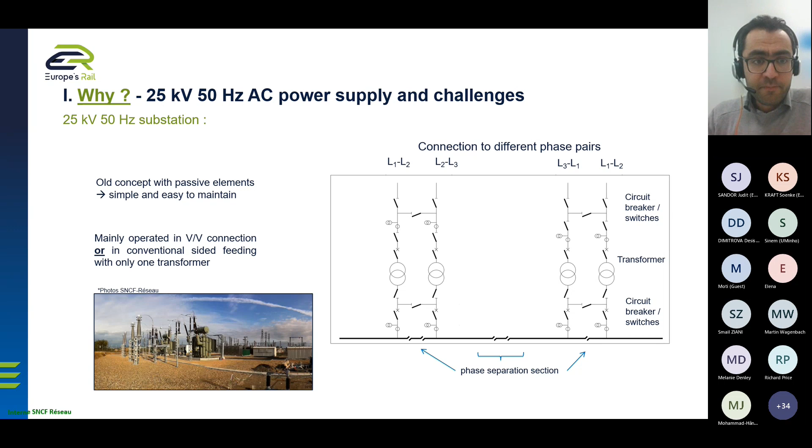The first challenge is increasing traffic. In the future, all studies show traffic will increase, and as an infrastructure manager we should answer this challenge by increasing the capacity of the system. What is expected in the pluriannual energy plan in France, for example, is that we should answer the challenge by optimizing the infrastructure. We should increase overall traffic, especially freight transportation, and facilitate the shift from other modes of transportation like classical vehicles. So we should optimize the power supply without necessarily creating new heavy installations. That's why we should optimize the existing ones.

Another challenge the 25 kilovolt system is facing is voltage imbalance. This results from the conventional connection between the transformer substations and the transmission system. A conventional substation is connected to a pair of phases, and it draws its power from 2 phases of the transmission system. These connections are alternated from one substation to another, and overall we face an imbalance in the voltage at the transmission system. This raises questions and problems regarding the quality of the power. The operator of the transmission network, if we are not compliant with certain thresholds, can impose financial penalties. This phenomenon can also affect other consumers connected to the transmission network. That's why this voltage imbalance should always be kept in check.

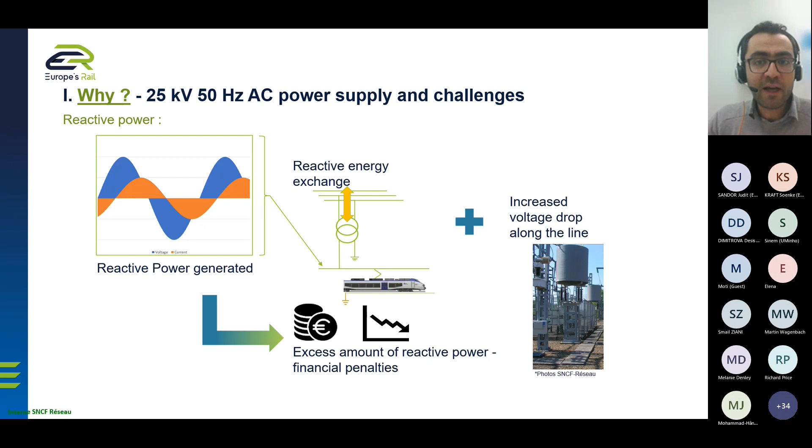Another challenge is reactive power. We are working on AC traction power supply, so in addition to voltage imbalance, the transmission operator fixes thresholds for reactive energy exchange with the transmission network. Again, if we exceed the threshold, we have additional financial penalties. Today we usually use passive elements to address this reactive power, like the voltage drop on the line. These passive elements are okay, but they are limited in their impact, so we need better solutions to tackle this problem actively.

Another challenge is the phase separation section, which is the separation between two collateral sections. On the 25 kilovolt, 50 hertz power supply, this adds some constraint on the operation of trains. For example, the driver has to deactivate or open the circuit breakers when the train is running through this phase separation section, which leads to decreased power quality and decreased efficiency. This aspect is related to the topology of the 25 kilovolt power supply. I think one of the aspects we should consider when optimizing an existing solution is to try and eliminate this constraint. For example, in DC traction power supply, we don't have this constraint on drivers. When we think of an interconnected system, we don't usually think of separation between the networks, so we need to connect the system to make it interconnected.

So what are the solutions? How are we tackling these challenges? In work package number 3, we worked on FACTS, flexible AC transmission systems. These are power converters that can be installed and connected to the existing system. They can also be an alternative solution to conventional substations. These power converters can actively control power flow, either reactive or active. When we talk about a smart grid, a smart traction power supply, we should integrate these technologies. They are very important in a fully interconnected and integrated rail power supply.

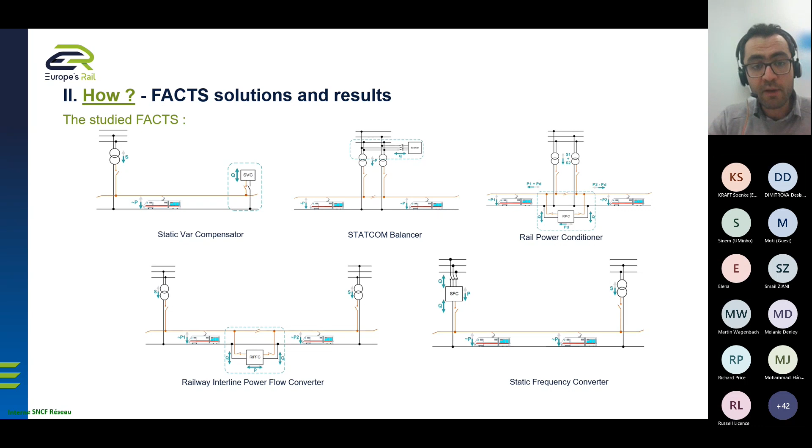In WP3, we based our study on two use cases, two lines in France. The first, use case number 1, is a 25 kilovolt line supplied by 7 substations. This line was a good use case because today we face a lot of power quality problems on it, so it was a good basis for studying and evaluating the advantages of FACTS.

The second use case is a line operating on 2 times 25 kilovolt, supplied by 3 substations. It already has good power quality, but we studied it because it's a good way to compare the technology to 2 times 25 kilovolt, since that is already a way to improve power quality. So we based our studies on these two use cases.

Some of the results I will not go into in detail, but I'd be happy to answer questions later. For the static VAR compensator, we tried to mimic what an ideal double-side feeding would produce on a line. We did a lot of investigation, especially Esmeralda simulations and Citrax Track Designer software, as a basis to compare and see the actual possibilities of the SVC.

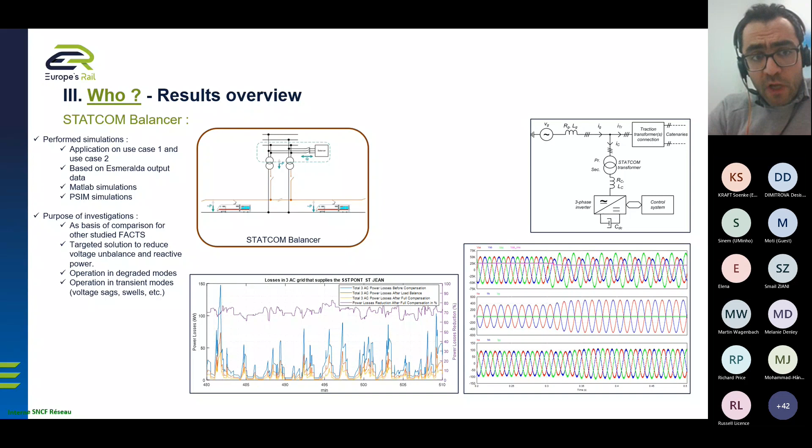RPC is the monophasic converter installed on the secondary side of the transformer substation. As with the StatCom balancer, we studied transient phenomena like voltage sags and swells, and the active power transfer between one section and the other. We showed it has some advantages, and if we tweak the system and control method of the converter, we can produce another type of application, presented in the next slide.

The RIPFC is the monophasic converter connected to allow double-side feeding, mainly by allowing active power transfer between one section and the other, all while keeping conventional substations operating on different phases. We investigated several control strategies and identified one as the most promising. We showed this system basically has an SVC feature, but it can also transfer active power. We increased the readiness level of the system, and we think it's promising for the next phases of investigation.

The final system is the SFC, static frequency converter, the triphasic-monophasic converter which is supposed to replace a conventional substation.

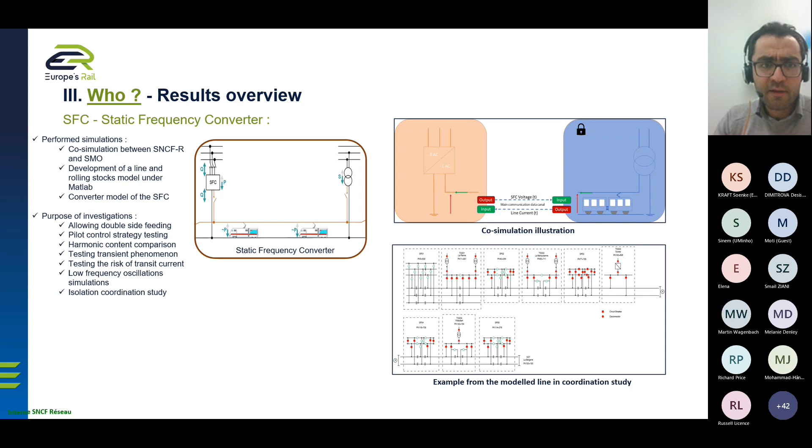We investigated the pilot control strategy, meaning the SFC will synchronize with the transformer on the adjacent substation. We also investigated low frequency oscillations and did an isolation coordination study, which shows the evolutions we should consider when adapting the protections. So it's a very promising solution, and FACTS can allow double-side feeding into 50 hertz.

Finally, the cross-project challenges the investigated technologies help resolve: our FACTS technologies can be solutions to increase traffic capacity by upgrading the 25 kilovolt line. They enhance voltage level and overall power quality, so we can use them as a way to answer increasing demand.

Improving asset management: when we talk about FACTS, we talk about smart grids, ways to better manage active power and energy inside the traction power supply, improving asset management overall. They can also allow future interfaces with other energy production like renewables — we haven't investigated these aspects, but it's totally a possibility.

And finally, the virtual model data: active FACTS, flexible AC transmission systems, are active components. We gained a lot of experience in virtual modeling because we used several simulation software and co-simulations, and gained a lot of experience regarding this aspect.

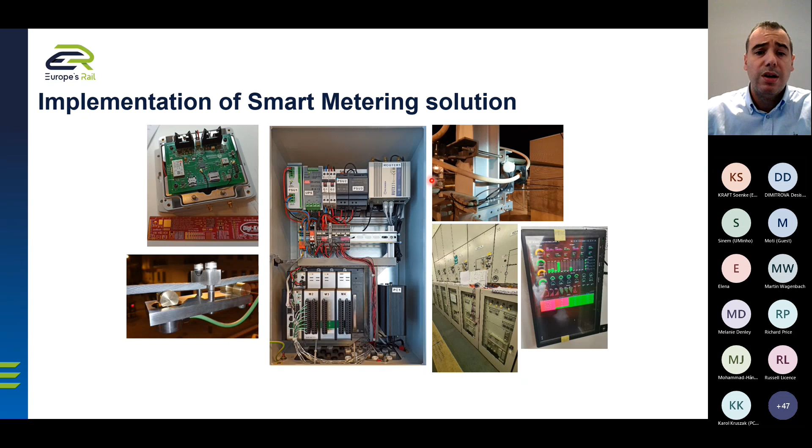Now I will present in more detail the impact of smart metering. I will start with the asset management topic, with an example about fault detection for catenary systems. This user application is, I think, novel and very useful because we have two novel approaches.

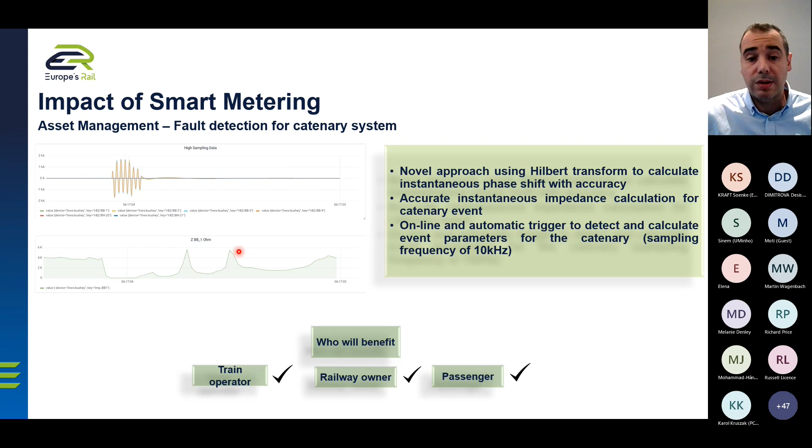So here we have an example of the high sampling frequency from the current and the calculation of the impedance, with a low value that corresponds to a really high value of the current. And of course, who will benefit?

So the train operator, the railway owner, and the passenger. Another interesting impact of smart metering about asset management: we also have, for use case 2, an interesting approach using machine learning about the track switches to detect and get more information about failure detection.

Now I will talk more about the energy consumption and the demand. One of the most interesting user applications, I think, is the detection of regenerative braking energy using machine learning, and it's possible to quantify this kind of energy. This is for use case one.

I think it's a very interesting approach, especially about DC, because like this it's possible to use only sensors in the infrastructure to detect the braking energy. And it's possible to quantify this energy and maybe improve energy consumption, because it's possible to have more information on where to install some storage, some batteries, to capture this kind of energy.

So of course, who will benefit? The train operator, the railway owner, and the passenger.

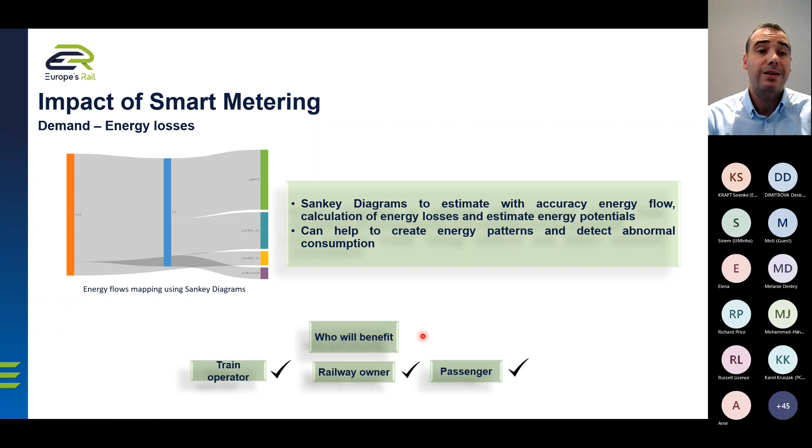And I will now talk about another impact: it's more about the software validation. So the real data we use is also very useful to validate or improve the software tools.

So the train operator will benefit, and also the railway owner.

Now I propose to take a look at the impact of smart metering, but with an interactive session, to show directly what our dashboards look like and how it's useful for a user, for an engineer. So I will share my screen again for just one moment.

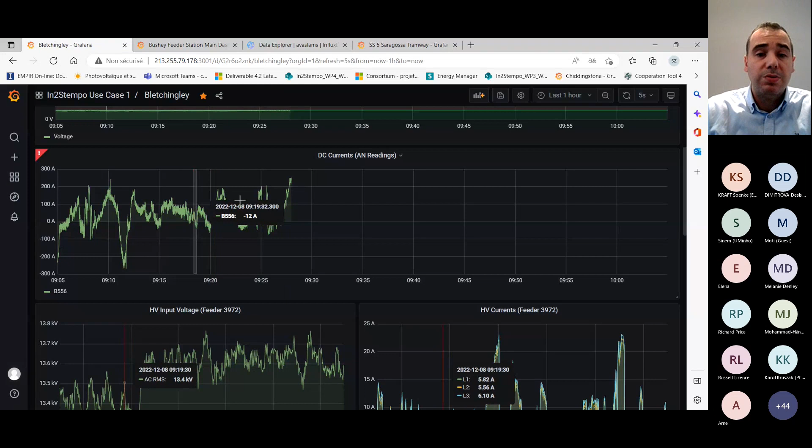Okay, so I will start with this kind of dashboard to get more information about, for example, the current. Here we have live data from Bletchingley, a substation from use case one for the Tonbridge railway line. So it's possible to take a look at the data, for example, from the current, from the feeders.

We also have the DC voltage from the catenary, and it's possible to have information in real time and some interesting indicators. For example, we have information about the apparent power and also the power factor.

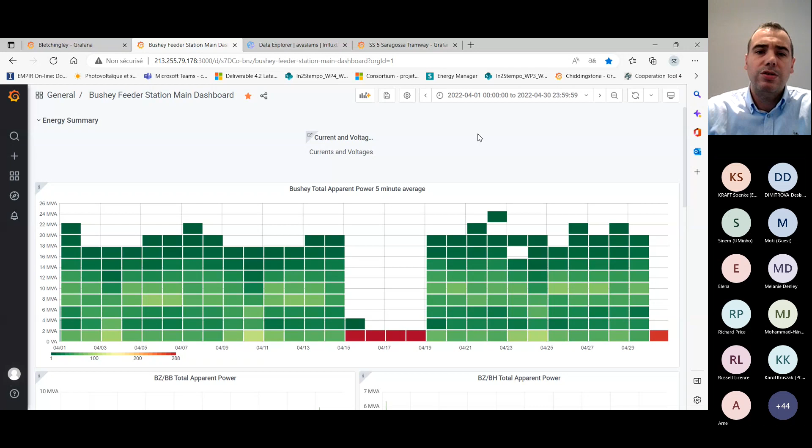I will also show very quickly another interesting user application. Here it's more about use case 3. I'll just refresh the logging and show you use case 3. Just a reminder, it's more about 25 kV here and 50 hertz.

So here, for example, for the month of April 2022, you have information about energy consumption. Here we have the power for 1 month. It's possible to zoom in to have more information about the consumption and peak loads, because you have a high sampling frequency of 1 second, to have more information about the peak loads energy. So you have the power.

Just to give you better information about what I presented before about the detection of events like short circuit for the catenary, we have some triggers, some alarms, for example, for low voltage and high current. I can show you a quick example.

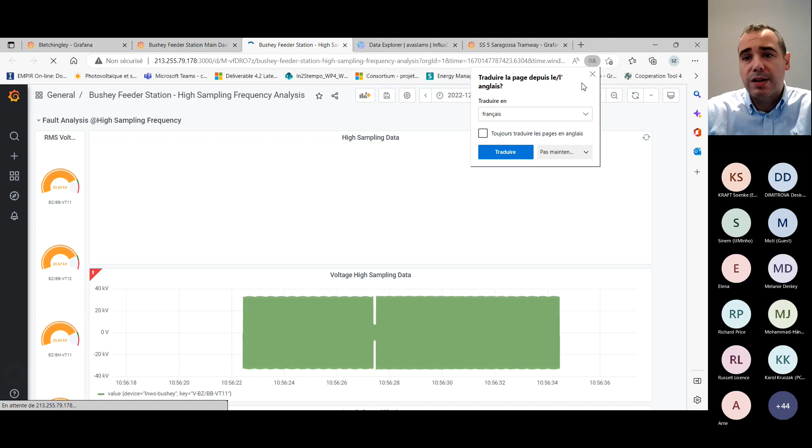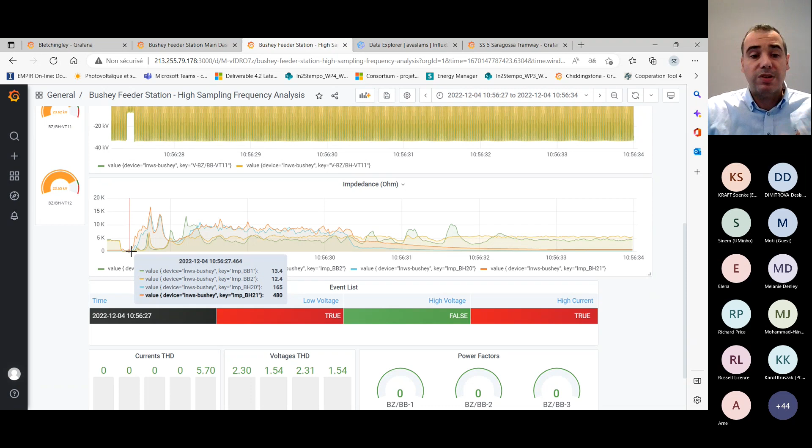Here we have the acquisition at a high sampling frequency of 10 kilohertz from the current and the voltage, so we have the raw data. We use this kind of raw data from the current and voltage to calculate, for example, the impedance of a defect, and like this it's possible to have information about the location. We also add other indicators, other alarms, for example from the THD. Here we can see that the current from the THD is a little bit high.

Another example, I think it's very useful for a user to understand how it's possible to create a dashboard or an indicator. Here we are in the database of work package 4. For example, for use case 2, we can take a look at the data to show some examples. I will submit this kind of data to show how easy it is for an engineer to create an indicator or information.

So I'll take a look at the script from InfluxDB, the script from Influx. I'll copy this script. I'll go to the dashboard of use case 2. I just need to refresh the access. Okay, I need to add a new panel, for example. I'll create it and add the script, paste the script. I'll refresh, for example.

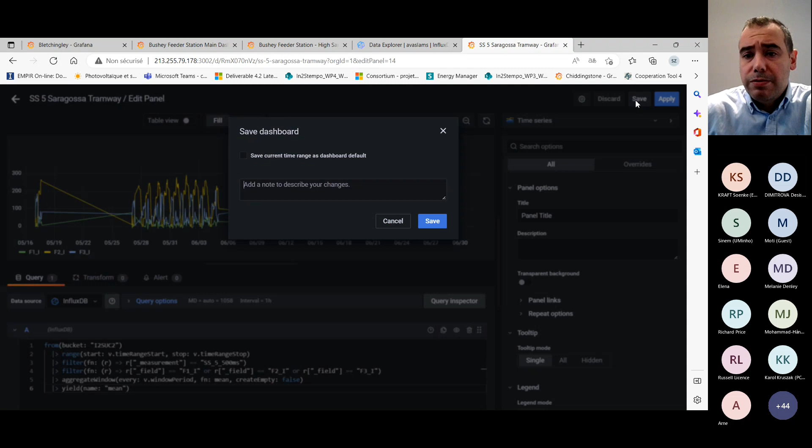Now I have access to the data, for example, for the 3 currents from the feeders from substation 5. I'll save this, and come back to the dashboard, and I have access to this new panel very easily to get the data. I can zoom in and zoom out on this dashboard, and change the sampling frequency very quickly, for example, just to put here another piece of information from the data.

So if I want to take, for example, 1 minute, and refresh, I have the information with better accuracy, for example. I'll come back to my presentation to finish.

I'll finish with the addressed cross project challenges. We have 3, of course: the demand, improving asset management, and the virtual modeling versus the data. Our contribution for work package 4, for example for the demand, is the energy flow information, so we can help identify opportunities for reducing losses and improving efficiency by using timetables or driving style changes. It's possible to have more information on how we can reduce energy consumption.

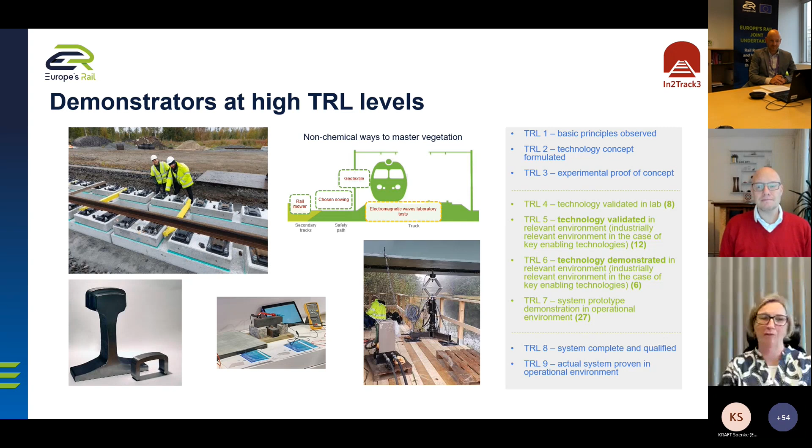Thank you, Pernilla, many thanks for your introduction words on this cluster. We are going indeed to go now into the details with one of the solutions you mentioned, the 3MB system. So I'm inviting Carlos Hermosilla to join the virtual stage. Carlos, you have been working for the past 10 years at the Acciona R&D Center, and you are somehow the co-author of the 3MB system that will be presented today. Carlos, please, the floor is yours.

Thank you, Sebastian. Yes, as Sebastian was saying, I'm Carlos Hermosilla. I was deeply involved in the development of the 3MB concept from its very beginning. The 3MB is basically a slab track system composed of precast elements.

The idea is that it would be modular as much as possible, so the assembly would be easy and the positioning would be simplified. It has a top-down alignment strategy, so the rails are placed exactly in their correct geometry, and then the difference between the substructure and the rail is gapped with in-situ fast-setting mortar, so that it takes less than 24 hours to harden. It was designed to allow all kinds of traffic, from the very heavy to the very fast.

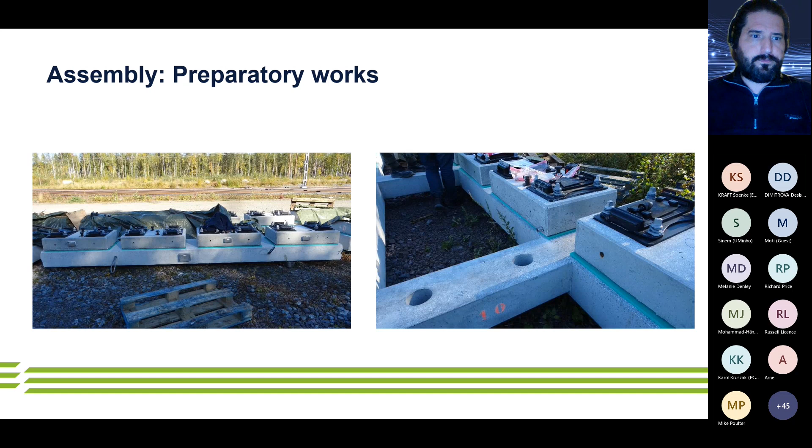Here are some pictures of the assembly. The system was originally thought out to install the base slabs first and then the blocks, but we made some tests and discovered they could be assembled in full modules. Each module is 4.8 meters long with 8 blocks. After all the modules were in position, which took about 20 minutes per module, the rails were placed and the leveling of the system started.

In order to level the system, we used a device we call false sleepers.

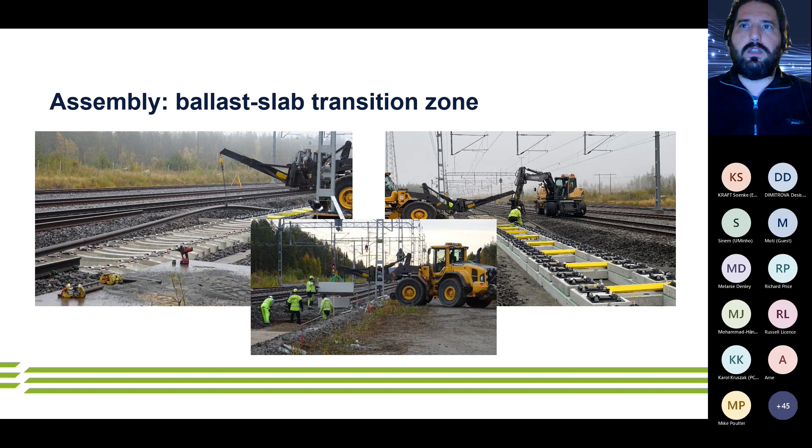The pouring of the concrete was performed at night because we were very short on time and had to press on. In this picture, you can see the false sleepers in place, the formwork for the mortar, and the contraptions used to help the mortar go into its place.

And here is a short movie that Trafikverket prepared with more information.

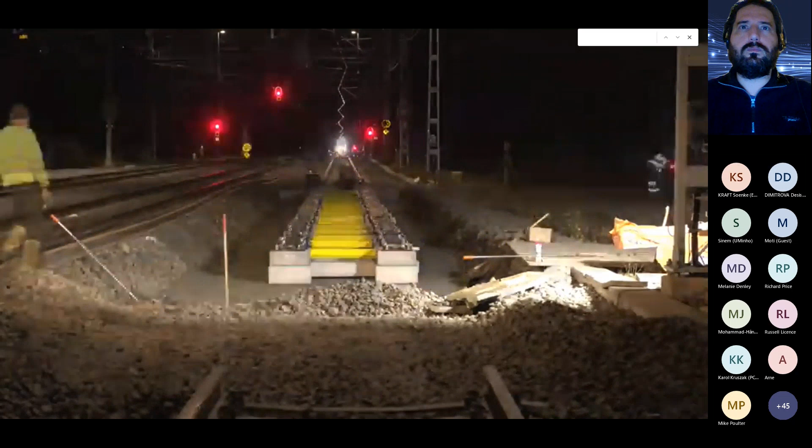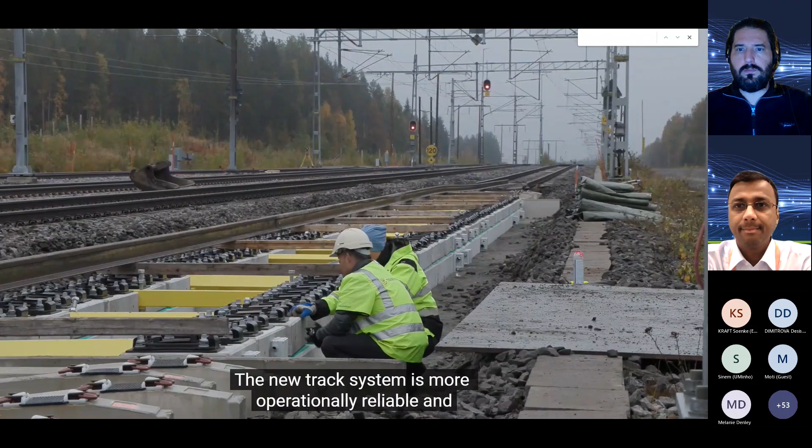Within the EU's railway research programme, Shift2Rail, a new type of track system has been developed. It can be described as a hybrid between ballasted and slab track systems. The new track system is more operationally reliable and requires less maintenance work than older models. It's much faster to build and install, and current maintenance methods work as well. The unique thing about the new construction is that it's made of modules, allowing components that break or settle to be fixed easier and faster than today. Overall, it leads to increased certainty when calculating life cycle cost.

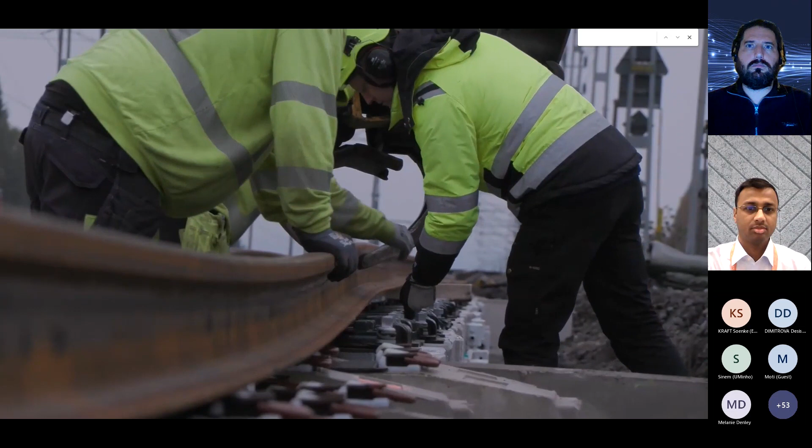The track system is tested in regular traffic on Malmbanan. The full-scale field test is carried out over a distance of about 50 metres at a place in northern Sweden called Gronsjö.

Coming out in track is important and necessary. However, safety is the most important issue when we are out in track. This is a collaboration between the infrastructure manager, the industry and the academy.

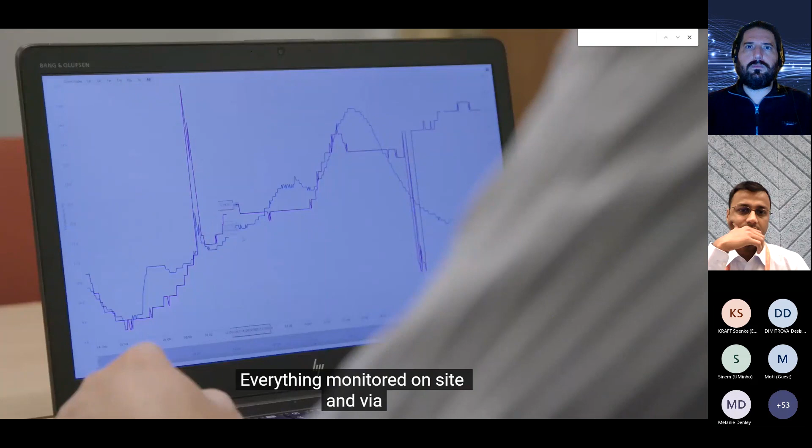We are here to evaluate the performance of the track system. The demonstration will last for almost 2 years until 2024. The entire life cycle is tested from installation to operation and finally decommissioning. Everything is monitored on site and via continuous digital diagnostics.

The work to develop the new track system has taken almost 10 years, and it's adapted to really heavy freight traffic, up to 32.5 tonnes axle load. The new track system is also adapted for high-speed trains, up to 400 kilometers per hour.

With the construction of this demonstrator, we have reached a critical milestone in the development of the 3MB system. After 8 years of design, development, testing and optimization, we're finally ready to install in real operational track. Not only that, but this track, the Malmbanan, offers extreme conditions with very heavy axle loads and very low temperatures in winter.

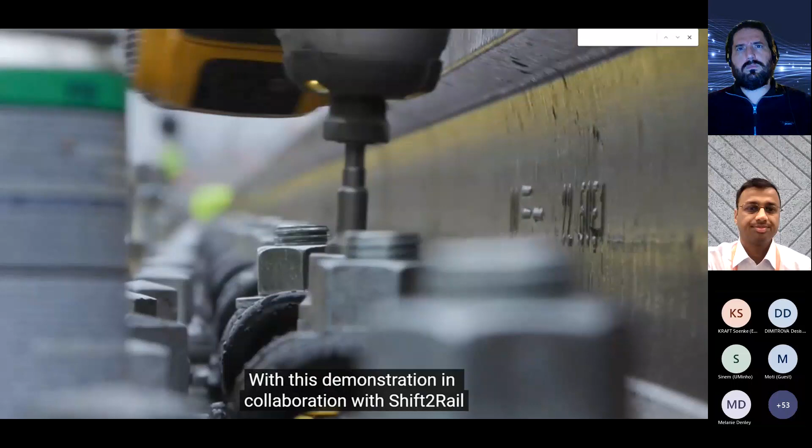With the data we recover, we will validate the system and know that it is ready to offer to the market. With this demonstration, in collaboration with Shift2Rail and Trafikverket, Sweden is at the forefront of research and innovation for a new track system - one with increased lifespan that saves both money and time, as well as contributes to increased accessibility and punctuality in both Sweden and the rest of Europe.

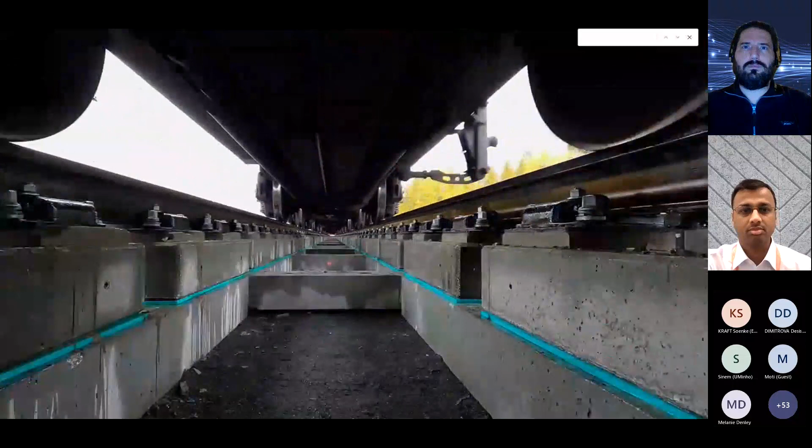So as the video said, we're monitoring this in real time. We installed some dynamic and static structural sensors, basically accelerometers and strain gauges.

All this equipment is connected to 3 computers that are currently up in the north of Sweden in Gronsjö, connected to the internet, and we can access those data remotely. Next, please.

Next, that will be all. I think I've been able to fit it into my allotted time. Thank you for listening.

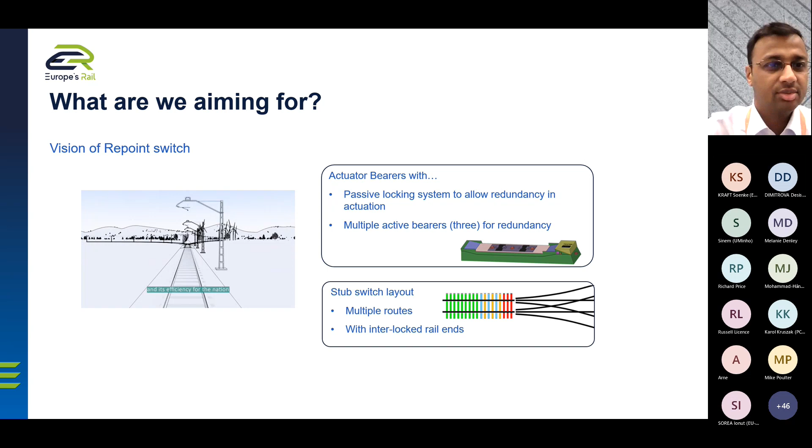So what has been going on until now, and what we are doing now within In2Track3. As I said, there are 2 main ideas within this concept: one is the actuated bearer, and another is the stub switch layout.

Within the actuated bearer, we have successfully installed a proof of concept in Great Central Railway in the UK in 2019, and in January 2020 we had a big event where we invited industry partners to witness the development, and we also ran a train over it to demonstrate that it is working. But this concept demonstrates only the actuated bearer - it is still installed with the conventional switch rail, not the stub switch rail.

And with the stub switch layout, we have only built a demonstrator at lab scale, approximately a 1 to 5 downscale demonstrator.

And this demonstrates what is the stub switch layout and how it will be actuated in the stub switch layout. And within In2Track3, we are planning to combine both and proceed to our ultimate goal of the stub switch layout in the actuated bearer.

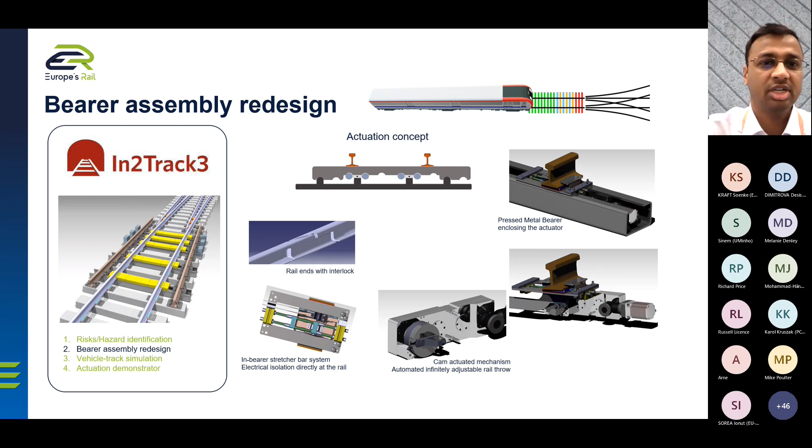And then this is the components within the bearer and the camshaft actuation, and these are some of the mechanism beneath the rail. And what I show here is the expansion joint, or the stub switch modeled in an expansion joint format.

And the next task, we are doing a lot of vehicle track simulation, where we run a conventional passenger vehicle in a simulation environment through the track. And we have the vehicle model and the infrastructure model both together integrated in the software package SIMPACK.

And in the next package, we are yet to begin this. We will develop an actuation demonstrator within the lab environment with the updated bearer design, and also with the expansion joint, to see how far, and to find out some learnings before we go on site.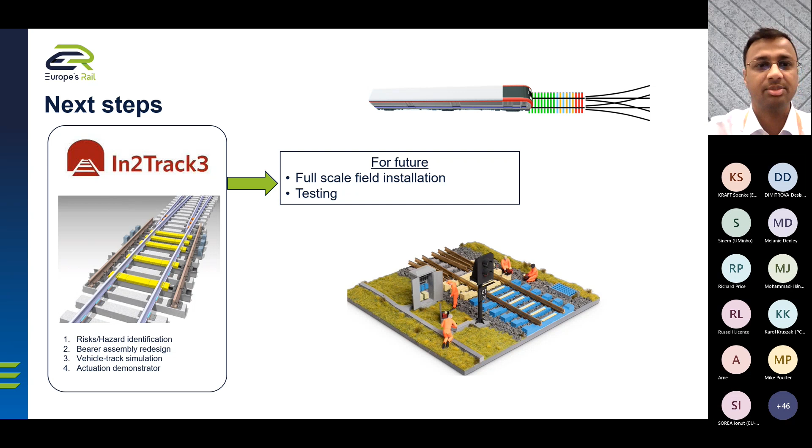Yeah, those are the next steps. And thank you for your attention.

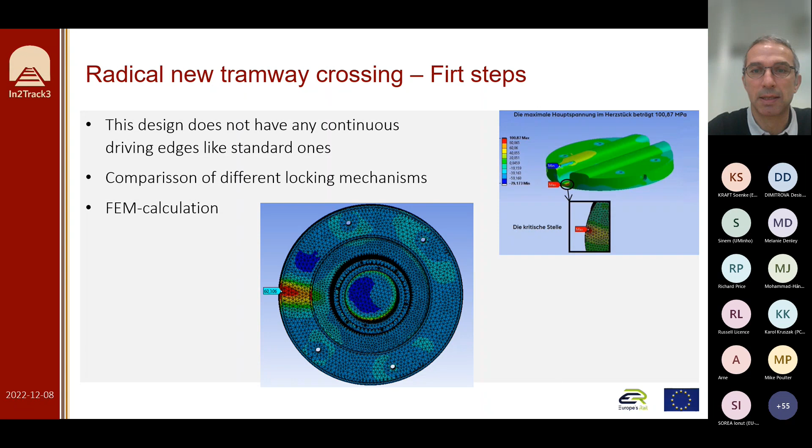And the second critical component of this new concept is to define the actuator that will turn the table. Here again, they thought about different concepts, and finally they decided to go for an actuator based on a one shaft driven transmission. The main reason was that it was estimated to be the more reliable mechanism.

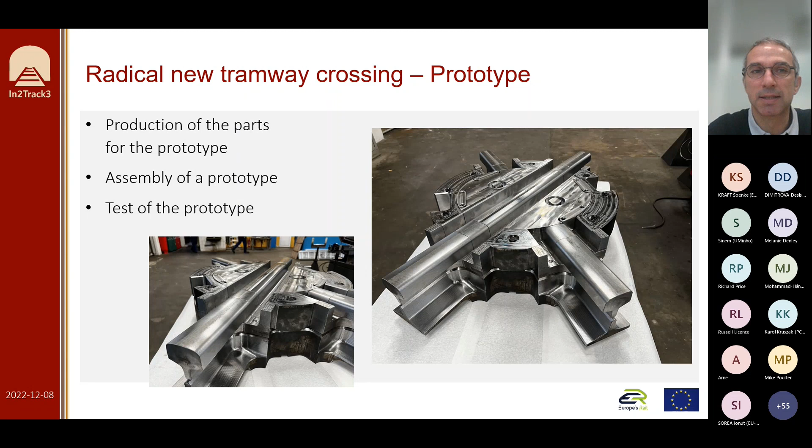And next, please. So finally, the next step will be to install this full-scale prototype in field. It will be installed in voestalpine facilities in North Germany. They have to wait for the end of winter, so it will be installed in April next year, and they will make some testing during next summer in order to validate the functionalities. There will also be sensors installed on the prototype in order to measure the stresses and so on.

And so, as I explained before, this concept should be ready for the market around middle of 2024. And that's it for me. So thank you for your attention.

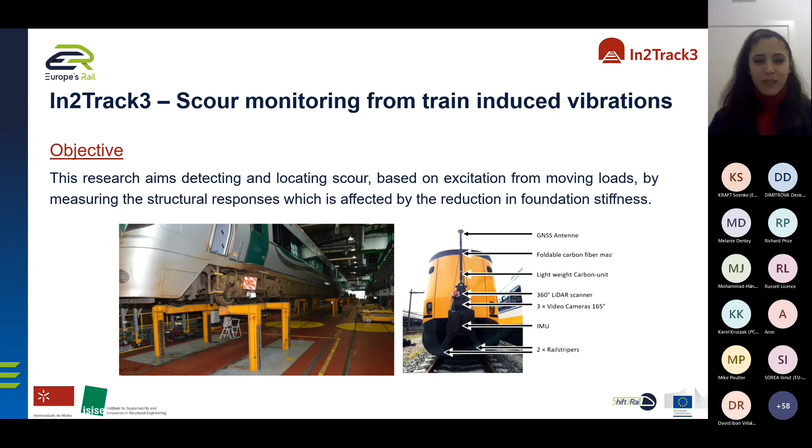So our approach consists of 3 stages. The first one is the on-bridge stage. This is a finite element model that calculates the displacements of the points along the bridge when the train moves. So this is a moving reference influence line problem. We're using the theorem of virtual works, and in the end, the apparent profile will equal the calculated moving reference deflection. Modifying the stiffness of the bridge supports will mimic the foundation scour.

On stage 2, we have an off-bridge problem. This is calculating the moving reference response to track with different ground conditions. The soil is modeled as a series of Winkler springs, and the train on the track acts like a continuous beam supported on a series of springs. We will also be able to model poor ground conditions using this model.

And finally, on stage 3, we will find the bridge stiffness. An optimization algorithm will be used to find the bridge foundation stiffness, and then in the end, the problem will be finding K, the bridge stiffness, minimizing the sum of square differences between values calculated using the numerical model and the corresponding measured values of apparent profile using the RILA units we mentioned before.

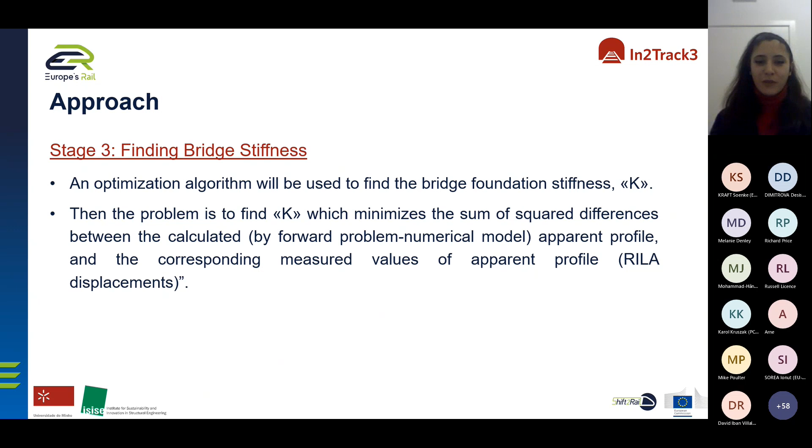And since RILA takes unloaded static measurements, it's located away from the axle. It's called static measurements, and it's more economical than loaded measurements and track geometry cars.

So this is the bridge we've been working on. It's Carlisle Bridge, and it has 7 spans. One span is approximately 13 meters. It has 5 masonry piers, electrified ballast tracks, and continuous welded rails. It has 2 fast lines.

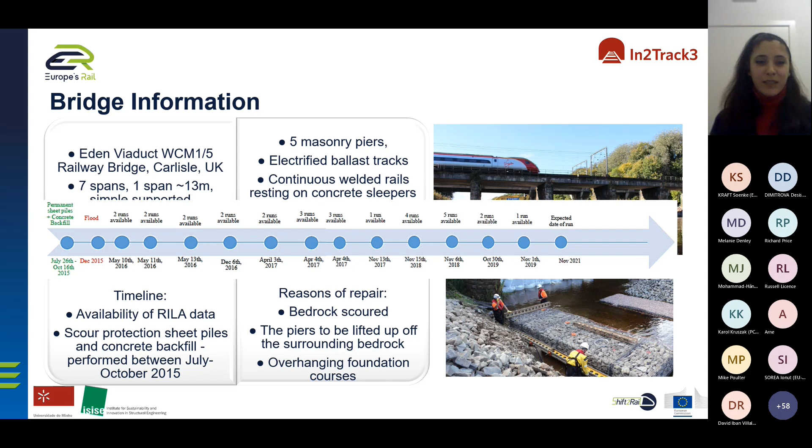So this is one of our preliminary results. This is the moving reference displacement response of the bridge under 6 axles. This one considers when the measurement point is ahead of the axles, and you can see the axles entering the bridge.

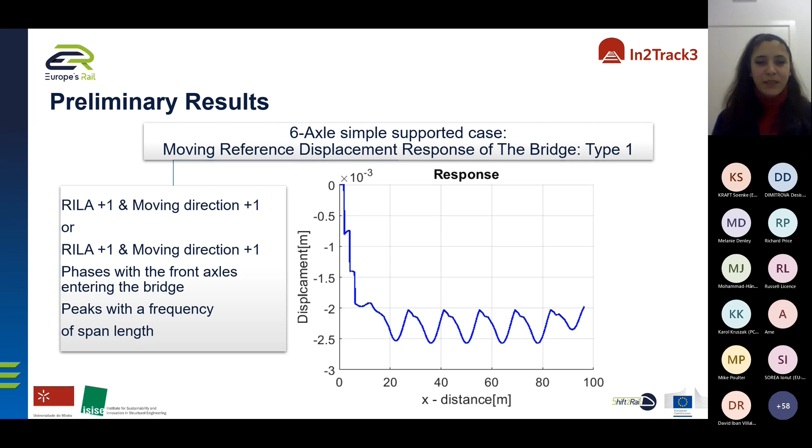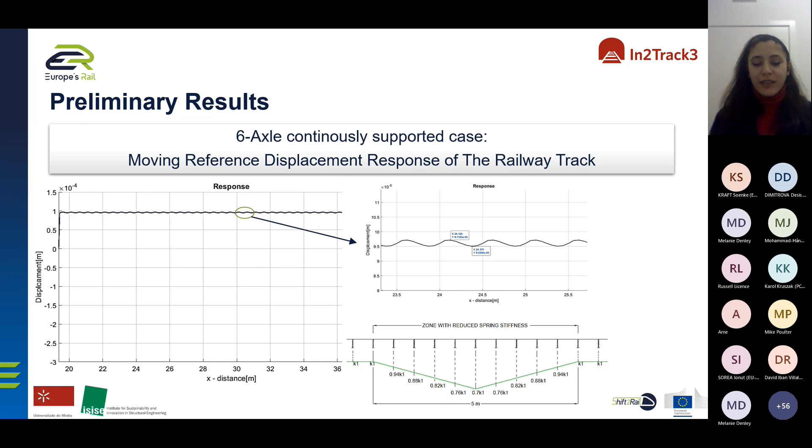This one is the moving reference displacement response of the railway track. Right now we are working on a reduced stiffness zone you see at the bottom. Then we will have the opportunity to relate the measurements with ground conditions.

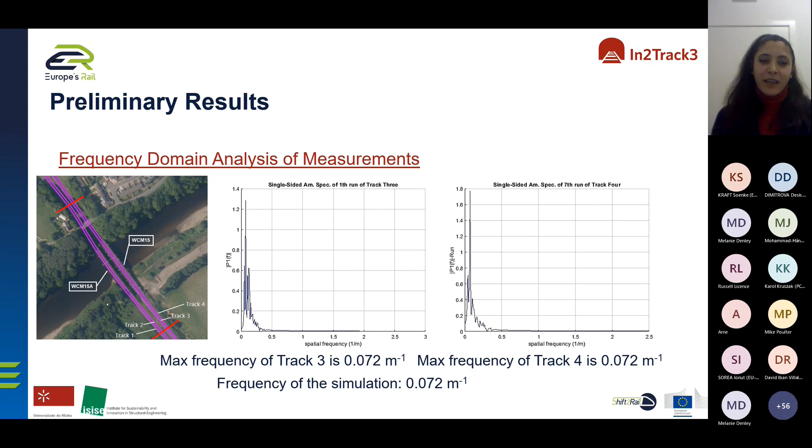This is a little bit of frequency domain analysis on measurements and also on simulations. We calculated the maximum spatial frequency, and we saw that the ones we calculated from measurements and the simulations are equal.

Our next step is finally having more robust mechanical parameters of the vehicle. We will use Monte Carlo simulation to generate these parameters, and then using a vehicle bridge interaction model, we will simulate the apparent profile. Using those apparent profiles, we will train a machine learning algorithm to again have mass and stiffness parameters. Then we are expecting to have more accurate calculations, more accurate displacement.

In the end, we will develop a damage indicator to prove the existence of scour, and it will be a function of displacement. Knowing the actual train weight will improve the damage indicator because it will reduce the scatter.

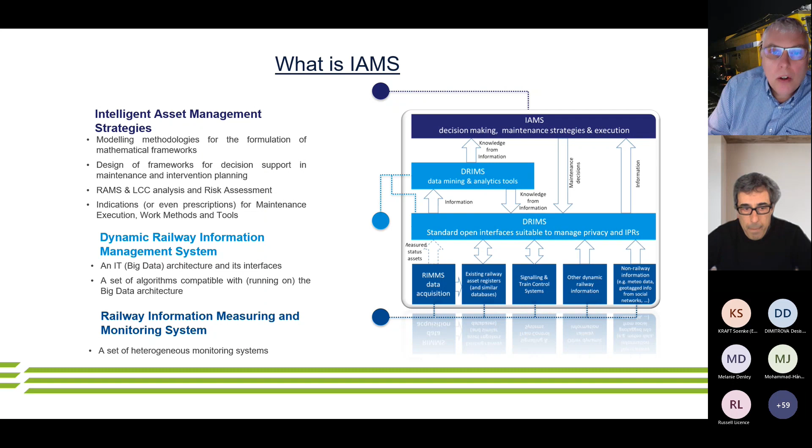Next slide, please. What I would like to highlight, in addition to what Carlo already introduced, since he explained the whole pillar of three TDs—TD3.6, 3.7, and 3.8—is that in TD3.8 we have, as shown on the right-hand side with some images, decision support based on the two other TDs. But there's one other element I'd like to emphasize: not only the decision support in TD3.8, but also the actual execution.

This execution took place in the context of what will later be presented by Amanda Hall about the robotic exercise we did in IN2SMART2, and also in the presentation that Christian Di Natali will give about the results from the STREAM project. So you understand that the execution part is also part of TD3.8, and there are other developments being presented as well. That's where I'll leave it for now.

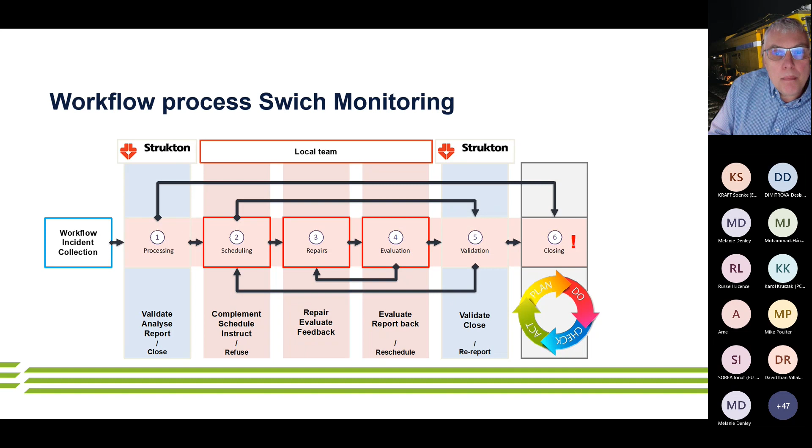So if you go to the next slide. Yes, this is another scenario. In this case, we use train-bound data, and we look specifically at fasteners. Working in this team and very close to our daily operation, we suddenly got the urgent request to look at fasteners.

What happened is that the requirements of monitoring the fasteners outside have increased. There was obviously an issue that fasteners seemed to be loose, and we needed to take action, or actually check all the fasteners. Now we can send people outside, but like I argued, we have limited time due to lack of people, and the possessions are not available either. So our operation was saying, we have so much data, isn't it possible to look at the fasteners and crack this problem?

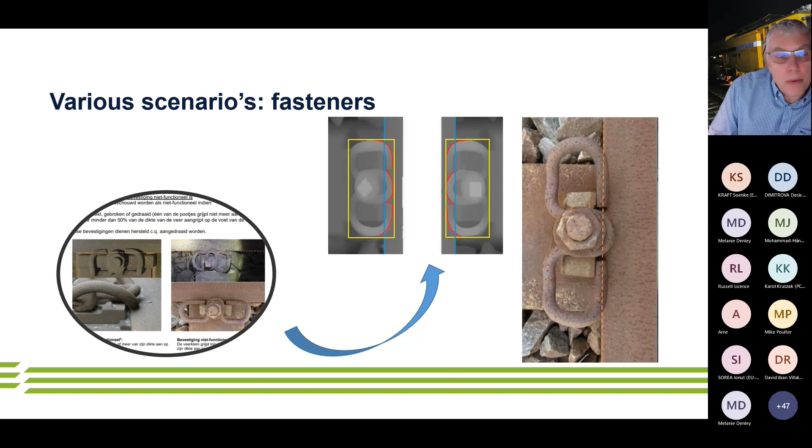So we looked at the video images that we had available, and we found that we can identify the rail foot and also the position of the fasteners. When it is a little bit out of position, or actually beyond the threshold, then it would be regarded as loose or not. So we were able to anticipate this urgent request from the operation. Next slide.

So by illustrating now the multi-use of our train-bound data, we have multiple data sources. If you go to the next slide and start the video clip for this. This is a small video clip without sound, and I will talk through it. You can start with it.

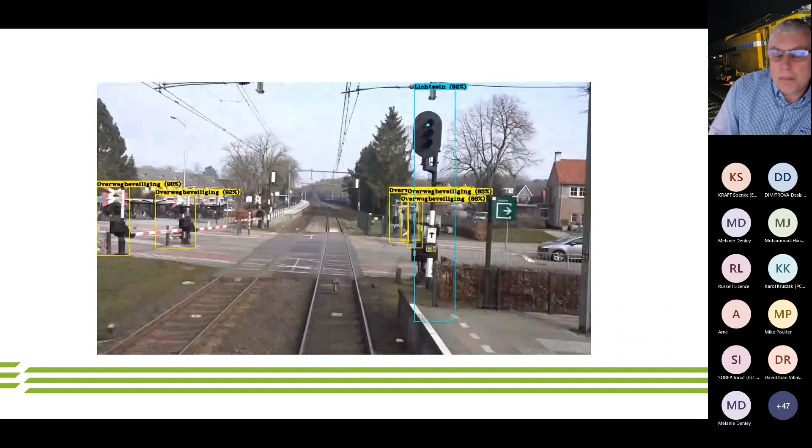Now, having this data, you need to have an interface by putting this data into the same context, the exact location. On the left-hand side you see the geographical information system, but then also the images. We get a Google Earth view on this. We can also recognize different types of objects, as you can see here.

We are also able to use the images, and we can measure parts of the images that we see. Here you can see in the control center the use of these images. This is more traditional data that we get in as well, but we use heavily the video images in combination with other data.

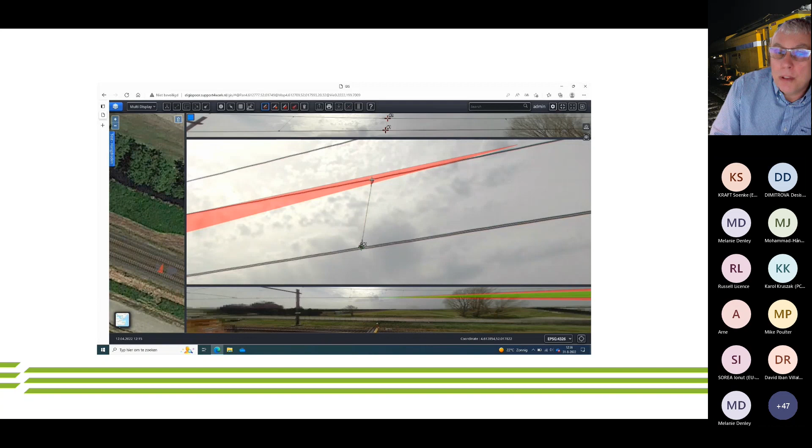Last but not least, we use the old tamping machine, but we can also use the equipment on alternative vehicles like lorries, meaning we can also go to different networks like a metro network or tram network. So this is what we actually did for the data acquisition, and now we are going to use the data.

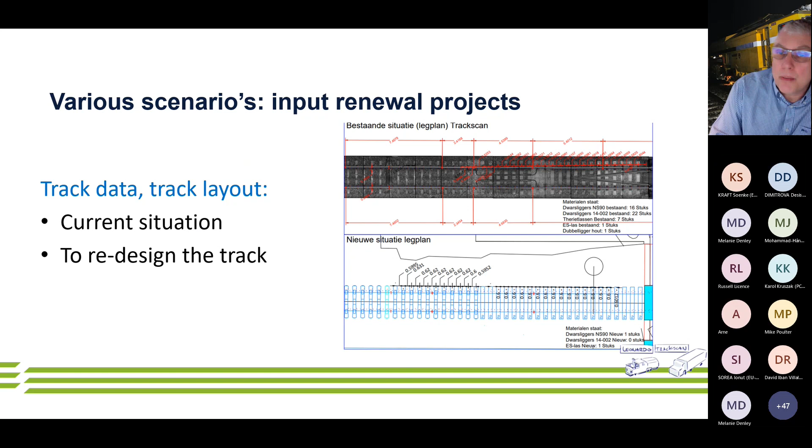Next slide, please. To highlight one of the scenarios I already mentioned, that is actually for the renewal project. On the renewal project, we used the video images, as you can see above, to generate the redesign of the track layout when we perform a renewal project. So we don't have to go outside. We use the data that we obtain from the Leonardo vehicle, and are able to use this data in combination with CAD systems in order to make the new track layout.

Last but not least, the planning. We looked at the planning in two different ways, more strategically, but also more operational. The first one is about the more strategic view on it. With that, I mean we have a time horizon for many, many months in advance, and we look at our total workload and the people, the resources that we have.

So if you go to the next slide and click on the video clip, it will start. What we do here is we look at the different regions that we have, both renewal projects, but also our maintenance contract, and we can map the track possessions, so that is when tracks are available for us to perform our work, and also look at our resources and how that matches together.

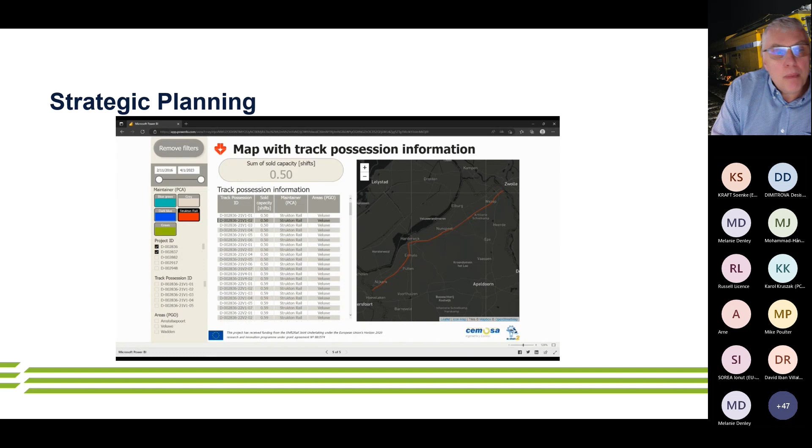This gives just the gist, so the different tools that we have developed. We have some different screens as well. It goes too far to go into too much detail right now. So this gives us a feel of what we need to do resource-wise in order to digest the workload that we have coming up to us. Now, another time horizon that we take, and if you go to the next slide, that is more operational.

From the back office, we actually get information on the actual status. And in our maintenance projects, we then need to plan our possessions, the actual possession from, let's say, in two weeks' time, so who's going there, but also which actions do we have to take.

If you take the final slide, indeed, what we do here is based on the predicted condition from, for example, the switches, but also the other items that we've been able to assess based on the data we have gained, we can then plan our possessions more carefully.

Besides the work originally scheduled, let's say for a year ahead, we also need to anticipate the risks that we suddenly see in the short term, to make the track more reliable, so that when we know a certain switch, for example, or the track alignment is not correct and might cause disruption in the near future, we address this before it actually happens.

So we look at the risks. Initially, we looked most of the time at tamping and the different kinds of tamping we were able to do to anticipate and correct the track alignment.

That includes the availability of machines and people, but also the time needed to go to the exact location, and how many of those locations you can cover in one possession, looking at the different types of tamping we could perform. So the whole optimization problem is rather complex.

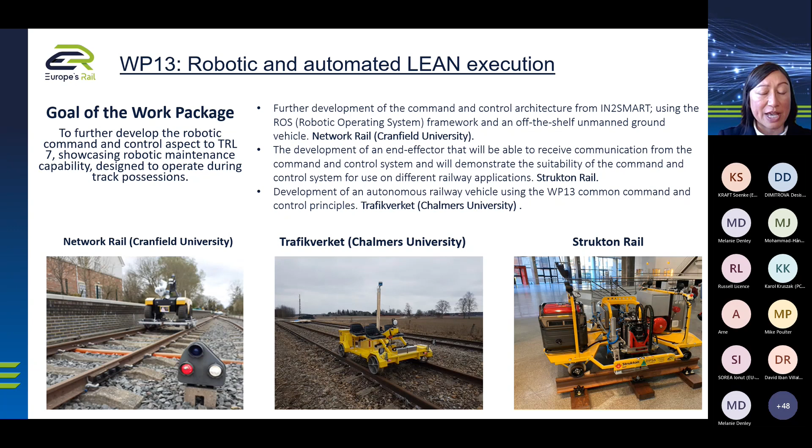And that was done by Trafikverket and Chalmers using a different type of vehicle. You can see the three photographs there. I'd like to show you a short video of the demonstration testing we did for the Network Rail and Cranfield piece at Northampton and Lamport Railway, which is a preserved railway in Britain. Can you run the video, please?

This project is with Shift2Rail. This particular programme is IN2SMART2.

We thought, wouldn't it be nice if we could have an autonomous robotic system that would be able to carry out some fairly basic inspection and maintenance activities, the sorts of things that are quite easily repeatable. Some tasks we actually do are better suited for robots than for humans, so you can have a safer environment, lower costs, and definitely better reporting.

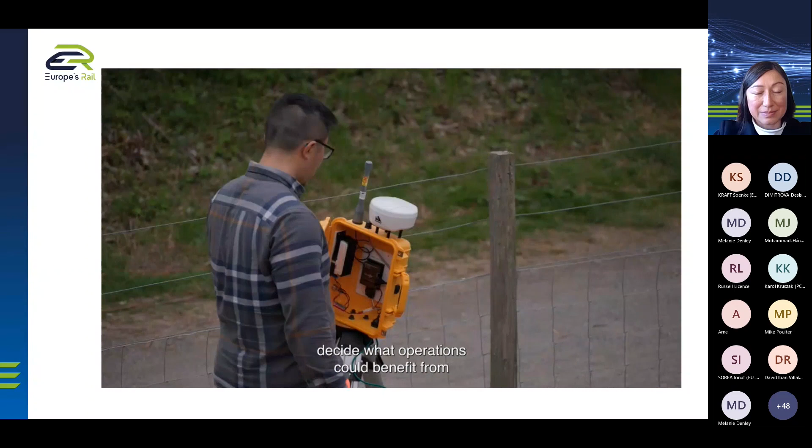I was involved in the very initial steps to look at whether robotics would fit into the operation of the railway, decide what operations could benefit from automated robotic systems, and then start to develop the command and control system, which we're developing here.

We are on a heritage railway. There's no other trains on the track, but we are able to test the vehicle over longer distances to ensure that the communications, the navigation and location, and the detection of the simulated faults are all done in a proper railway situation. This is our robotic inspection and repair system.

It has 2 parts. One is called Warthog, an unmanned ground vehicle, and they also have a track trolley. At the front, we have a stereo depth camera to give the distance of the front obstacles and trackside obstacles.

At Cranfield, we have a team of researchers. We've got some full-time research fellows whose job is to work on certain aspects of the project. The navigation of this vehicle will be based on GPS and autonomously, and it needs to be specified to an absolute level of accuracy. We applied RTK GPS in order to provide us global level of accuracy.

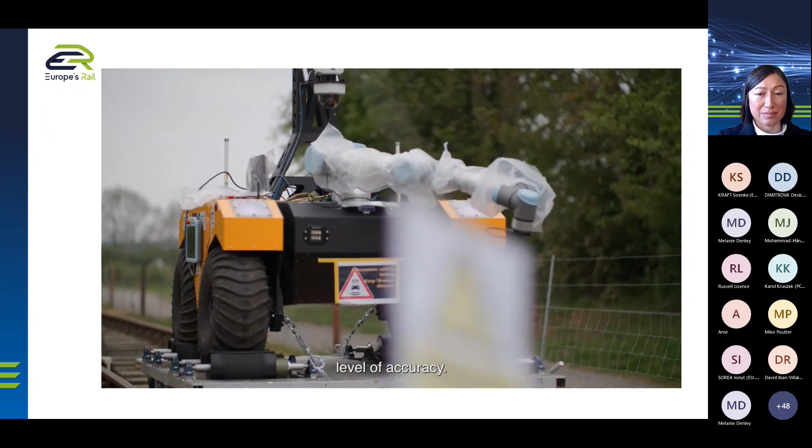At the top, it has a 3D laser scanner, called 3D LiDAR, to give you the point cloud of the surroundings. Last but not least, it has a robotic arm with a manipulator camera to give you a visual inspection.

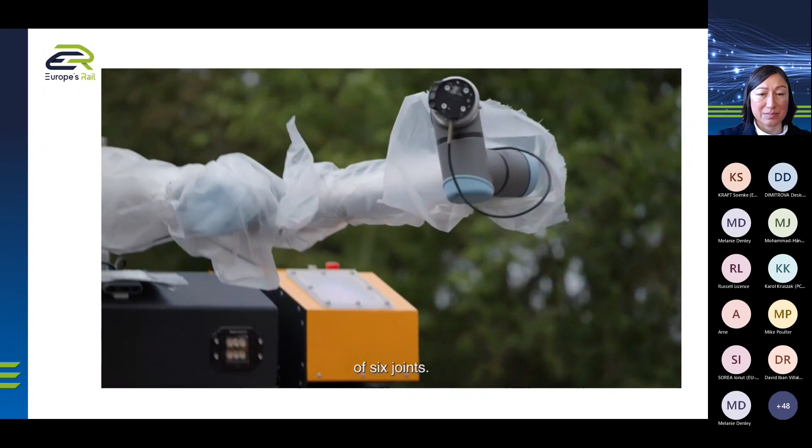I can tell the arm how much it should move in each joint. The robot arm has a total of 6 joints, and we can define how much each joint should move.

What we're using to simulate railway faults is a number of pre-printed QR codes. Then the robot's cameras pick up the location of those and record the data of where it's moved and how it has undertaken that inspection.

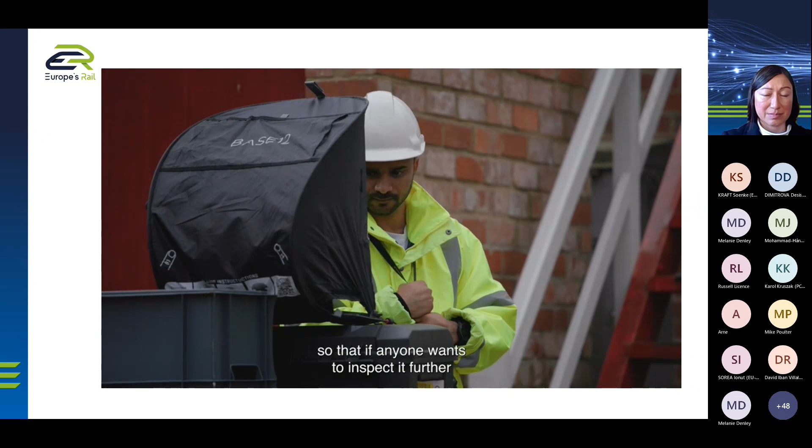We have 3 different QR codes. One will be defined as no defect, and it will just send a message and move back to its initial pose. When it finds the type A defect, it will take pictures. And when it finds type B, it will also save some GPS location so that if anyone wants to inspect it further, they can use the GPS location as a reference.

We can detect objects, and especially people, as the robot approaches working areas. We've added RGB depth cameras to be able to identify closer objects, and that's added to the robot's original capacity.

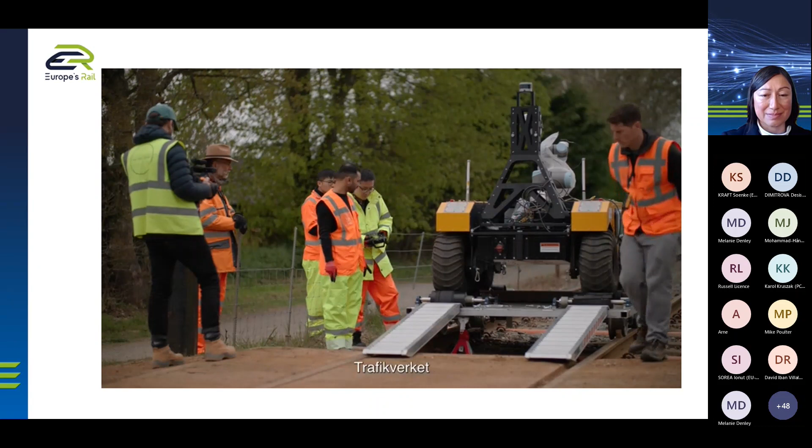Today we have seen very successful tests. We have been able to do the simulated work orders, and we have also been able to perform some unplanned simulated work orders. I'm immensely proud of everyone who's worked on this. We've had a huge team from Cranfield University, Network Rail, Structon Rail, and Trafikverket, and together we've managed to come this far. Here we are today, a success.

We've returned to the site at Northampton.

And push that onto the track.

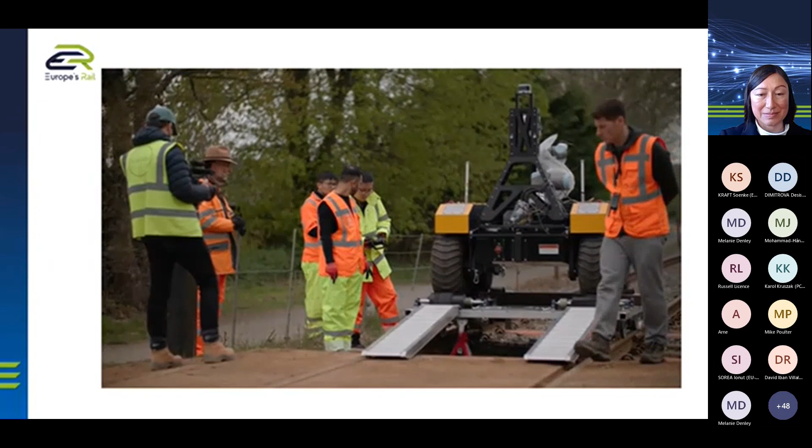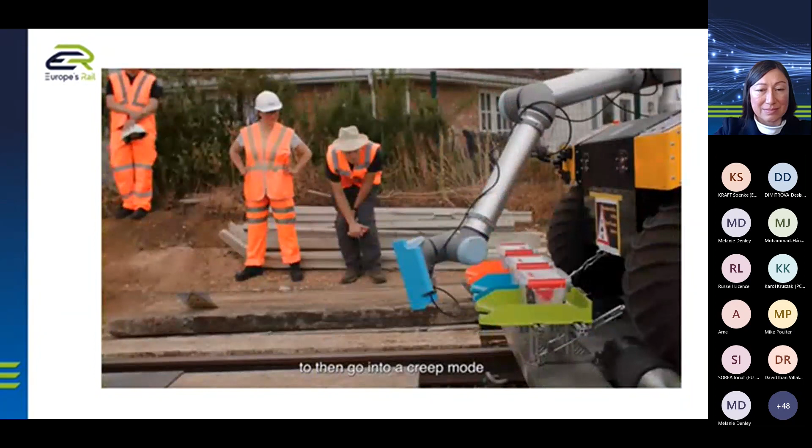We've returned to the site at the Northampton and Lamport Railway to demonstrate actuation of the robot. The tests today simulate a maintenance task being sent to the rail robot from a central maintenance system, the robot travelling to that location to then go into a creep mode to find the actual fault.

That fault is demonstrated in terms of a QR code. The specific QR code will tell the robot what action it needs to take, and that's demonstrated by the 3 different boxes full of different equipment. Then it'll pick one of the boxes and push that onto the track.

My name is Isidro Durazo Cárdenas. I'm a lecturer at Cranfield University. I support the work that we do for Network Rail.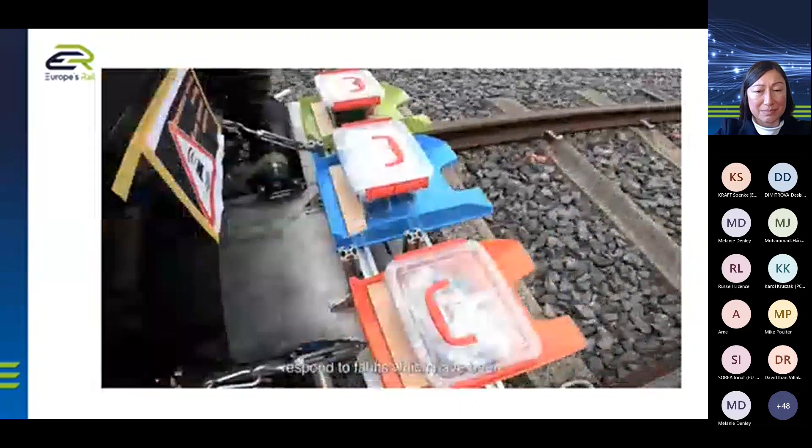It's much safer to use robots to do these kind of jobs. There might be traffic involved, so they're specifically tailored to do these sort of repetitive, hard jobs. In the future, the intention is that a fleet of such vehicles will be able to respond to faults which have been indicated either by human inspectors or by measurement trains, to investigate the faults further and to make interventions.

We're very proud of our researchers, our PhD students and our MSc students, because they contributed enormously to the development of this technology. What we wanted to do was to make sure that we had achieved everything that we wanted to do within the auspices of IN2SMART2.

I am very proud of being able to interact between the private and the public sector and being able to bring solutions to problems that exist in real life. Thank you. That's the end.

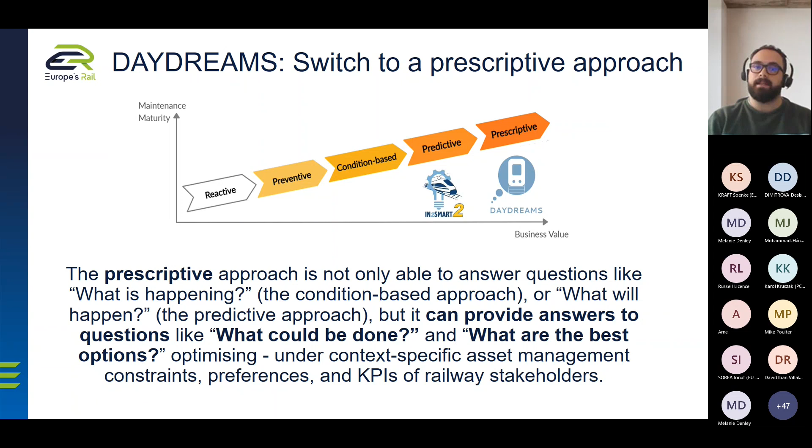In this context, we have the collaboration with Daydreams, which has provided a switch to a prescriptive approach in the analysis of data. Why the prescriptive approach? Because it can answer not only a question like what is the problem and where is it happening and what is the cause of the problem, but also can support the operator by giving suggestions on what to do. So providing additional support in the maintenance process by suggesting already predefined metrics and, let's say, improving defined KPIs.

The scenarios addressed by Daydreams are multiple. As you see here, we will focus on the first one, which is, as I said, the management of track circuits in a metro environment together with IN2SMART. As I said, the objective of Daydreams is to improve and make more robust the prediction of status of assets, in this case only track circuits, to support the operators, but also the step ahead is the using of prescriptive analytics and multi-objective optimization in order to provide not only additional information, but also additional suggestion to the operator, improving defined KPIs, such as we will see in the demo, maintenance operation duration or the cost of the operation.

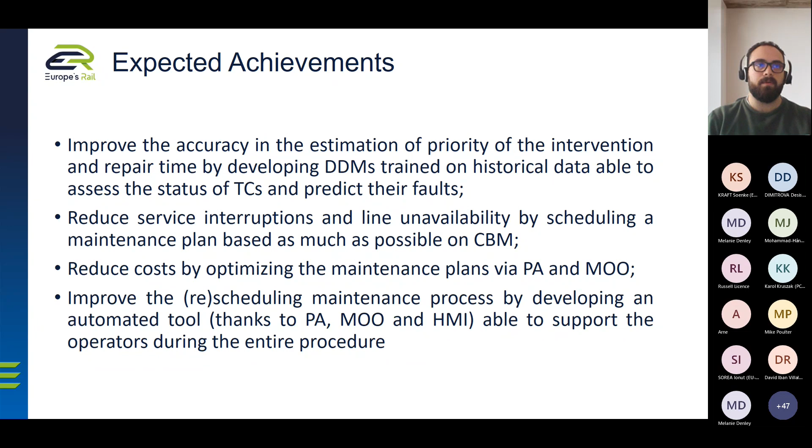These achievements have already been achieved, and the developments that Daydreams has produced is also, let's say, applied in the Metro Milan Line 5 use case, and ATM again is providing feedback on the use of the tool. So we will move now directly on the visualization. You are seeing the charts and the web interface, correct?

Sorry, I cannot hear you. Yes, we can see the chart.

Okay, perfect. So this is the web interface that Daydreams has provided. As you can see, the interface is the same for the other use cases. We will focus, as I said, on the Hitachi use case, so Work Package 4.

Here, the operator who uses the interface can visualize the different plans that the software provides. These plans are constructed based on the results of the analytics algorithm, which we will show further ahead. They apply a prescriptive approach, suggesting which assets need maintenance and how to schedule it.

By selecting one of the charts, as you can see here, you have a KPI matrix telling you what is the maintenance cost to maintenance duration ratio. With this graph, the operator is immediately capable of seeing which are the best maintenance plans. For example, this obviously is not the best one.

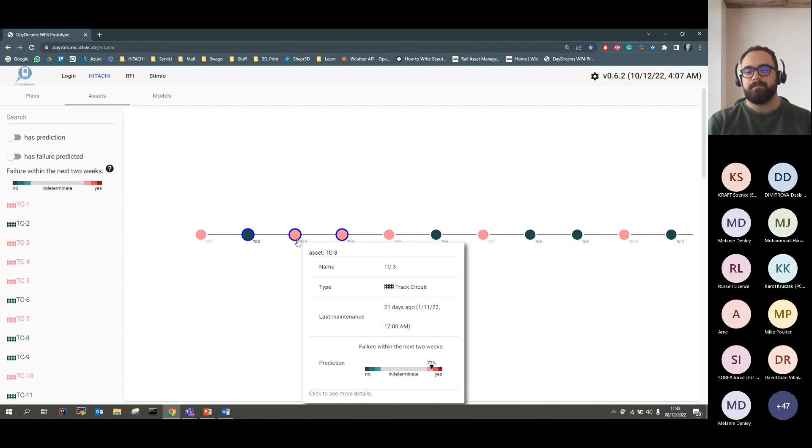The algorithm provides a prediction on which the plan is based, telling you if it expects a specific track circuit to be faulty in the next 2 weeks. So we have a differentiation between healthy track circuits that will not become faulty, and a prediction on possible anomalies on the track circuit.

This is the important part, because this is still a predictive approach. But if we go more deeply into the different models that provide the prediction, we can see here a list of different models that provide different functionality.

If we drill down on the failure model for the prediction of track circuits, the model provides the main features in the decision between healthy and unhealthy track circuit. These features are characteristic of the line, exogenous data of the track circuit.

Moving back here, we can see the binary decision tree, which provides the operator with an explanation on how the algorithm makes a decision. For example, here each node is a specific feature.

For example, here the number of loss of occupancy, and the month, so the period of time, is an important feature in the selection, in the characterization of faulty or healthy track circuit.

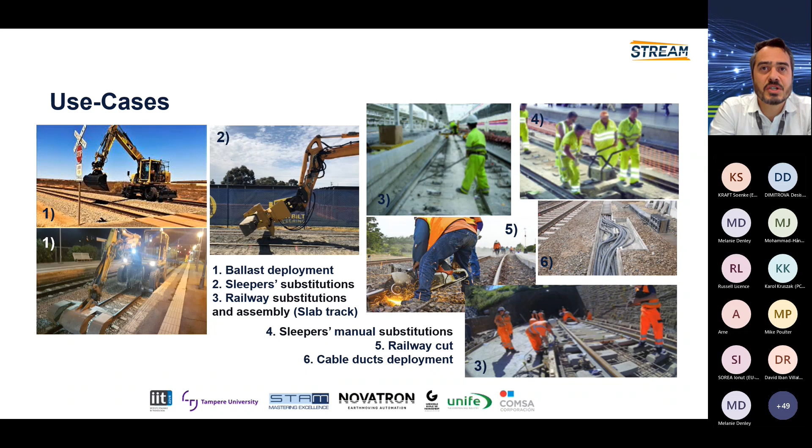These are the use cases of interest. We focus on the ones where both the excavator and manual activity are involved, mainly considering maintenance and renewal operations. We analyzed several of those use cases and generated specific solutions able to improve the specific working operations. We'll see a few results in the next slide.

This is the first technology, which we call OTA 3M. It's a control platform that can be adapted to any excavator, converting a traditional excavator into a robotic system by adding actuators, sensors, and a computer to run specific control algorithms. The main objective is to develop such technology to enable a supervised system or even a fully autonomous machine. In STREAM, we target the development of the most complicated concept: the fully autonomous system.

We define two operational modalities: the working mode, when the excavator moves its arm to accomplish specific tasks, and the running mode, when the excavator keeps its arm retracted and moves along the rail from point A to point B.

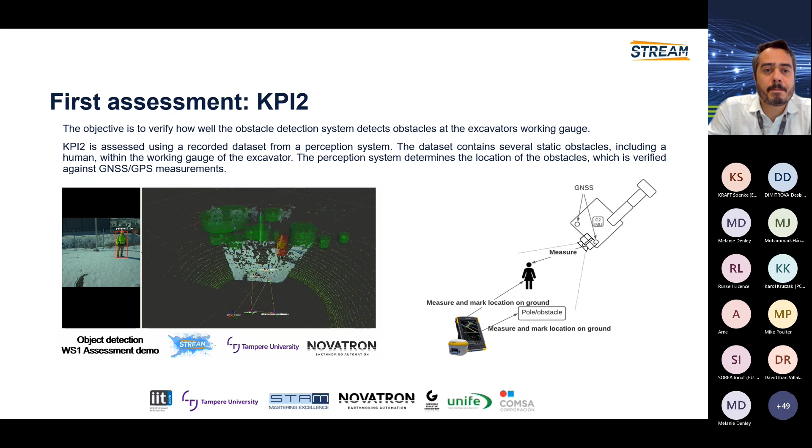The example we provide in this video shows the railway on the side, as you can see right now.

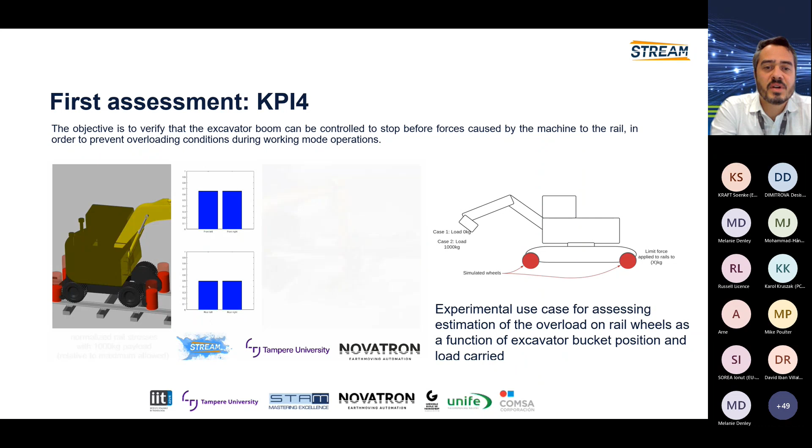So this is the last result I'm showing about this technology today. These videos show the ability of the controller to understand the amount of transmitted force on the infrastructure. The transmitted force is directly correlated to the instantaneous position of the excavator arm and the weight lifted. Therefore, the system is able to control in real time the maximum reach of the excavator boom to prevent overload to the below railway. You see on the video the red columns around the rail interface that are changing, showing the amount of force transmitted to the rail underneath.

Moving to the second technology, this is an exoskeleton that workers wear. This exoskeleton is an active device with electrical motor, sensor, and a computer on board. It has been developed, adapted, and customized for rail workers and rail applications, tailored to rail requirements to support workers during manual material handling. It is able to understand human activity to deliver a personalized assistive strategy. The main goal is to develop a device that can reduce musculoskeletal system overload, allow workers to experience less fatigue, and at the same time reduce the risk of injury.

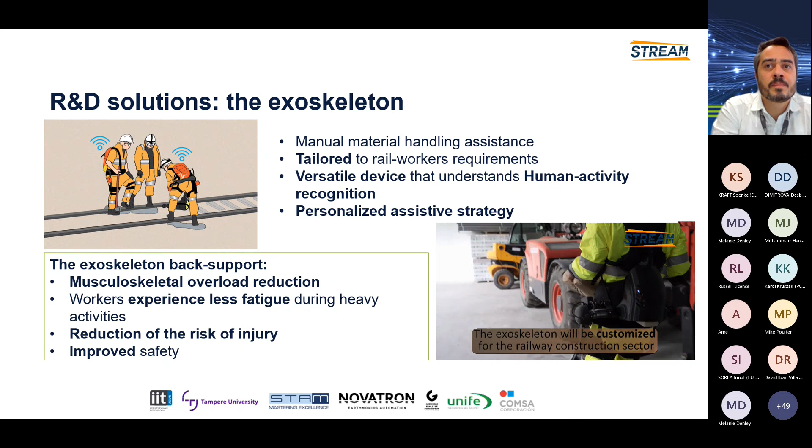So far, we have selected a specific use case, as you can see in the slide, where workers were performing lifting, transportation, and fine positioning of concrete blocks. This is a very transversal activity, and many other activities require lifting heavy objects like this.

So we set up a real environment simulation with several workers. We replicate the test with and without the exoskeleton to evaluate the performance. The test was an hour long for each modality. Then we moved to the laboratory to apply motion capture techniques and gather the measurement of muscle activity for each work task.

So we estimate the reduction of muscular activity that ranges from 15% to 22% for those working tasks we selected.

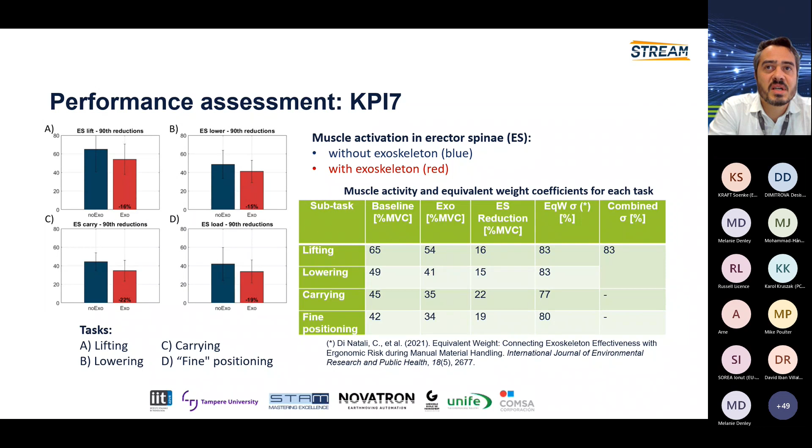So then we combine observational measurements and laboratory measurements to extract the reduction of lifting index. The lifting index is a typical measurement that correlates the ergonomic risk or the risk of injury and the manual material handling task. So we estimate an average reduction of about 52% for the lifting and carrying activities, moving the risk from high to low.

So then we measure the metabolic cost and evaluate the reduction using the exoskeleton. The test duration was an hour long for both modalities, with and without the exoskeleton. We replicate these tests for 5 workers in 3 different days each. So we cover about 3-4 weeks of test in a relevant environment.

So the results show that thanks to the exoskeleton, the activity moves from vigorous activity to moderate activity. This could be simplified as: without the exoskeleton, it's like climbing stairs for an hour, while with the exoskeleton, it's like doing gardening for an hour. What do you prefer? I guess you will choose to do gardening.